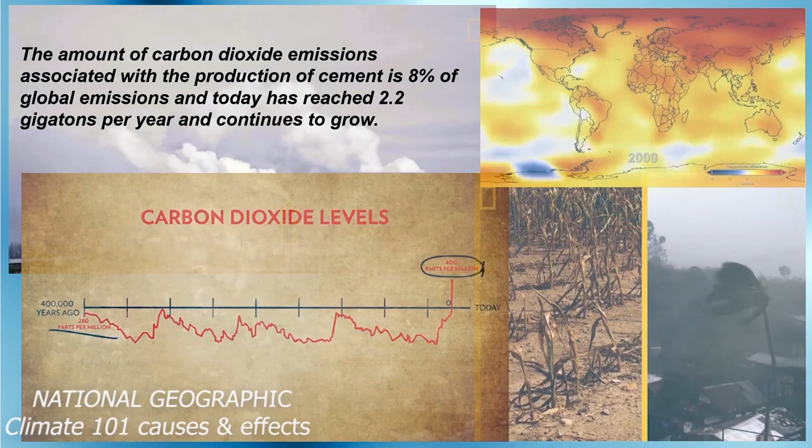The greenhouse effect is one of the main technogenic problems of mankind. An increasing amount of carbon dioxide is released into the atmosphere. At the same time, one of the significant sources of carbon dioxide emissions is the production of cement. In the production of cement, 90% of emissions occur during the manufacture of clinker. Therefore, reducing the proportion of clinker in a cement can reduce emissions by more than 60%.

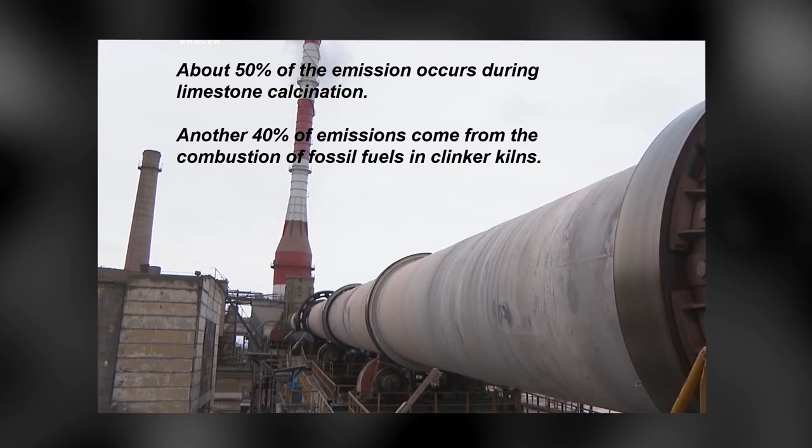One way to reduce the proportion of clinker in cement is to introduce active mineral additives into its composition, for example, granulated blast furnace slags. But exceeding the maximum allowable proportion of additives leads to a deterioration in the characteristics of cements. A further reduction in the proportion of clinker in cement is possible using various activation methods.

Our group is investigating the possibility of using magnetic spin effects to activate blast furnace cement. The effects themselves have been well studied. Their essence lies in the fact that magnetic fields affect the spin dynamics and control the spin multiplicity of radical pairs of substances involved in a chemical reaction. The problem was how to ensure a long-term effect of magnetic fields on the process of cement hydration, from the moment of mixing with water to long periods of hardening.

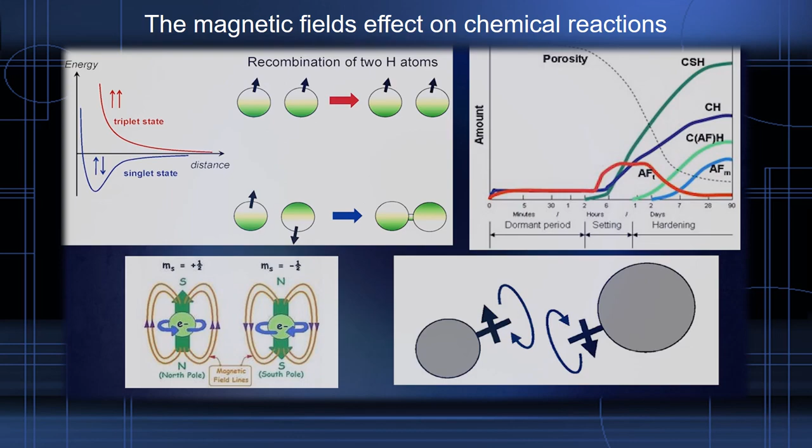We solved this problem by introducing a finely dispersed ferromagnetic magnetized substance into the composition of Portland slag cement. To reduce costs, it is proposed to use dusty waste from the metallurgical industry as such a substance. In our previous work, it was shown that the magnetic fields created by the dust additive can have a positive effect on the activity of cements. At the same time, it was revealed that the strength characteristics of Portland slag cement are affected by both the magnetization of the particles and the disperse composition.

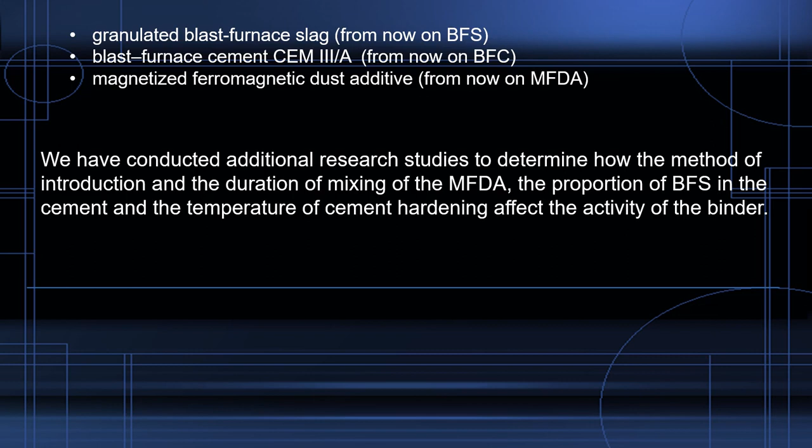The effect of the additive on the mechanism of hardening of the cement components and the structure of the cement stone was studied. In the process of research, nonlinear dependencies of the activation effect created by the additive on the technological parameters of cement hardening were revealed. Therefore, in the current study, we set the task to identify how the activity of the binder is affected by the method and duration of mixing the additive with the binder, the share of slag in the cement, and the temperature of hardening of cements.

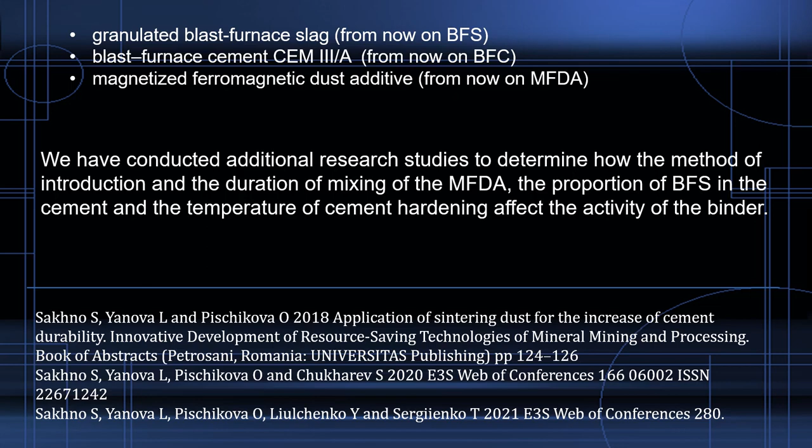The existing technology for cement production allows mixing the binder components either with the creation of tribochemical processes or without them. In the first case, mixing is carried out in ball mills. In the second, using mechanical mixers or air mixers. Mixing components in a ball mill can be combined with grinding of clinker, gypsum, and BFS or carried out after that. Therefore, three series of experiments were conducted in the research.

First, clinker, BFS, and gypsum were mixed in a laboratory ball mill. The mill was filled with MFDA at the amount of 2% by the weight of binder components. Next, joint grinding was carried out. Finally, an MFDA-free control binder was prepared similarly. Second, a ready-made BFC and MFDA were placed in a laboratory ball mill. In different experiment series, dust and cement were mixed from half to 16 minutes. Simultaneously, additional mixing of the control samples was carried out without MFDA.

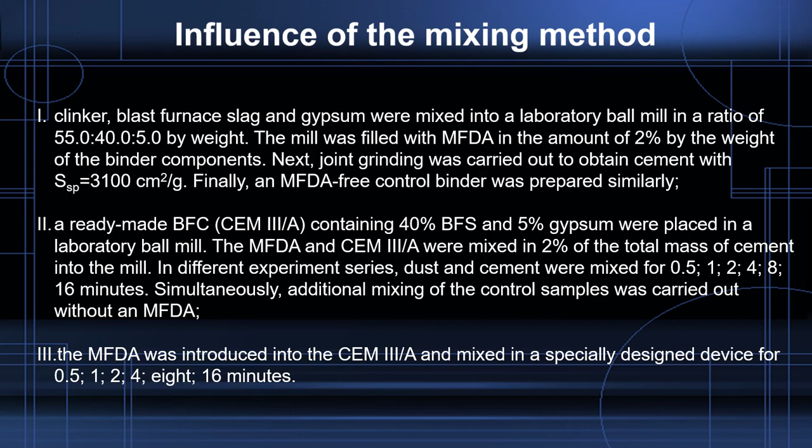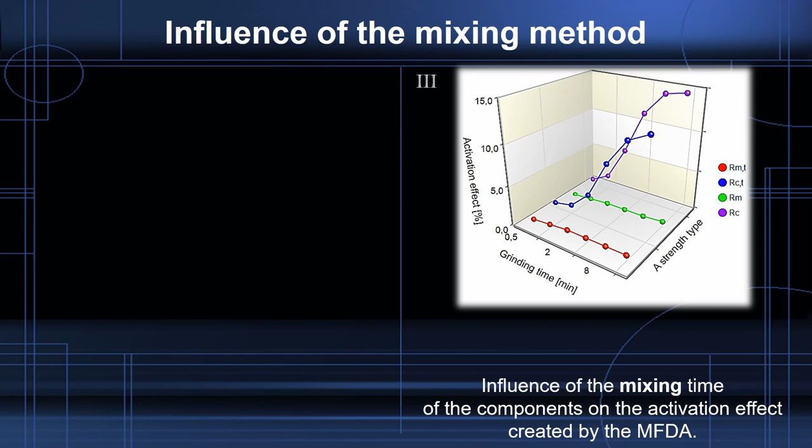And third, the MFDA was introduced into the BFC and mixed in a specially designed device for from half to 16 minutes. Mixing the MFDA with a binder by the first way does not create, and the third way creates a weak activation effect. However, when mixing the components according to the second method with an increase in the mixing time, the activation effect first increases and then decreases again.

The revealed regularities show that the magnetic fields induced by the dust affect the tribochemical phenomena occurring during cement grinding. With excessive grinding time, the size of dust particles decreases and causes them to heat up. This leads to an activation effect decrease after a specific time of MFDA joint grinding with cement. Thus, long-term grinding completely neutralizes the impact of MFDA. According to the results of the experiments, the optimal time for grinding the MFDA with cement is 5 to 10 minutes.

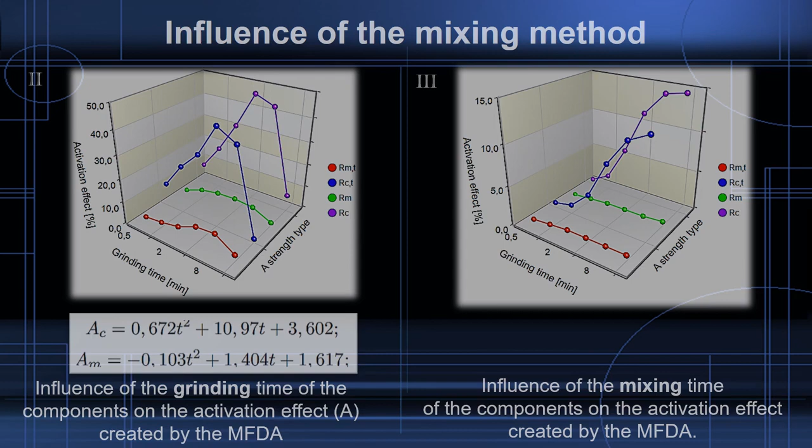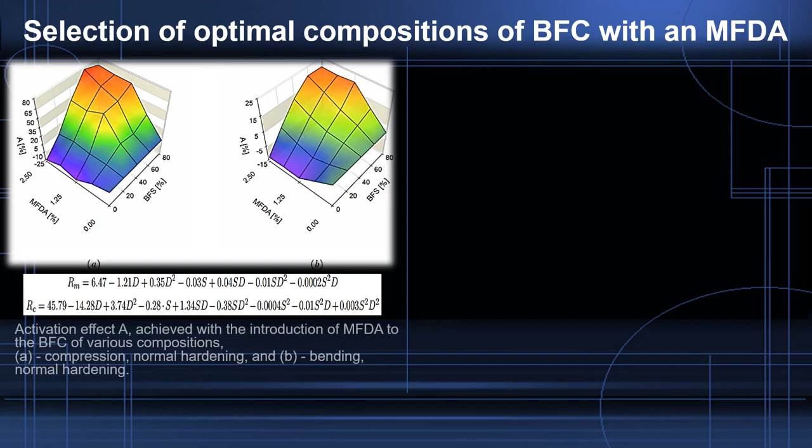Studies of the strength characteristics of binders with different BFS and MFDA ratios were carried out to identify the optimal amount of MFDA in cement with different BFS content. Investigated binders had in their composition in various series from 0 to 2.5% of MFDA and from 0 to 80% of BFS. The results show that with an increase in the proportion of BFS, the need for MFDA increases, and the activation effect enlarges. At the same time, an increase in the amount of MFDA added to BFS-free cement causes a drop in the activity of the binder. The reasons for this regularity were studied by us and described in a previous work.

The obtained data show that introducing an MFDA into the composition of the BFC makes it possible to obtain cement of equal strength with an increased BFS content against the usual range. The resulting decrease in the share of clinker makes it possible to significantly reduce the consumption of fossil fuels and emissions associated with cement production.

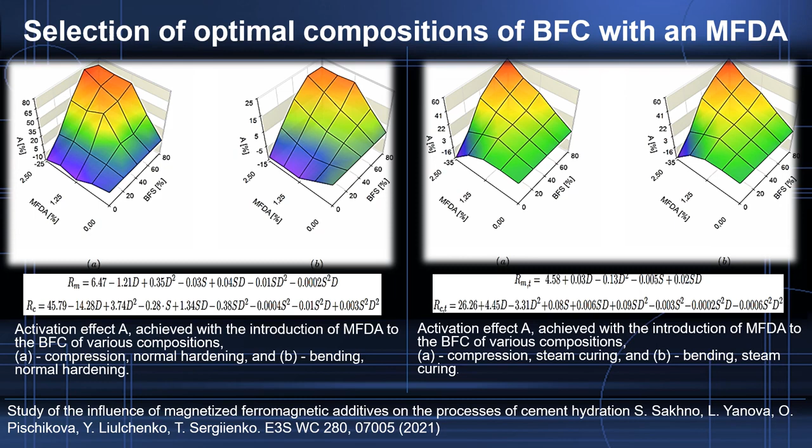The next technological parameter that we studied was the modes of hardening of BFC with MFDA. Studies of strength characteristics of cement steamed at different temperatures with different amounts of the added MFDA were carried out to clarify the optimal hardening regimes. The steam curing was carried out at temperatures of 50, 70, and 90 degrees. Samples were tested 24 hours, 28 days, and 3 months after steaming.

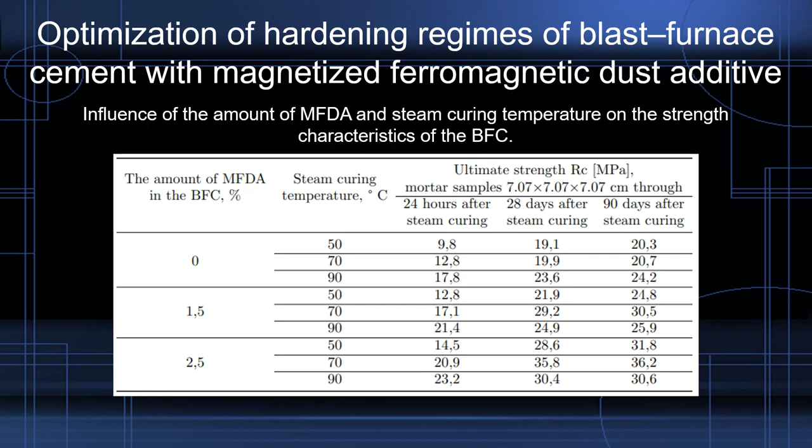The obtained data show that with an increase in the amount of MFDA in the binder, a more significant increase in strength is observed at lower temperatures. Thus, the combined action of the MFDA and temperature increases the destructive process occurring during clinker hydration and, simultaneously, intensifies the process of binding hydrated lime and slag hardening.

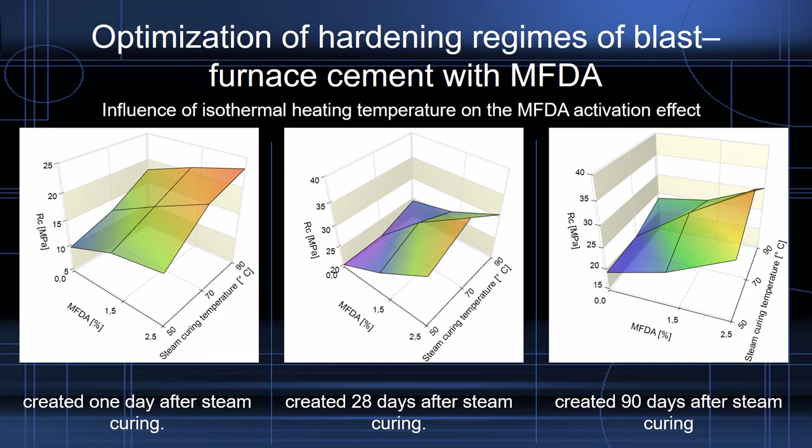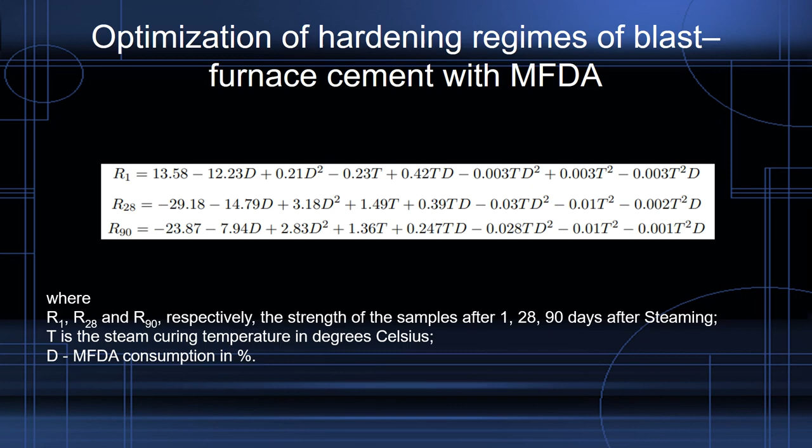The research results show that the most significant increase in strength has been observed in samples steamed at 70 degrees. The recommended steam curing temperature for ordinary BFC is 90-95 degrees. The introduction of MFDA into the composition of the BFC makes it possible to reduce the steam curing temperature of products by 20-25 degrees. Thus, the introduction of MFDA makes it possible to significantly save energy resources in heat treatment of prefabricated reinforced concrete.

Thus, the impact of the magnetic spin effects during the production and hydration of cements by introducing the additive we proposed into the composition of cements is one of the possible ways to reduce carbon dioxide emissions into the atmosphere and improve the climate on the planet.